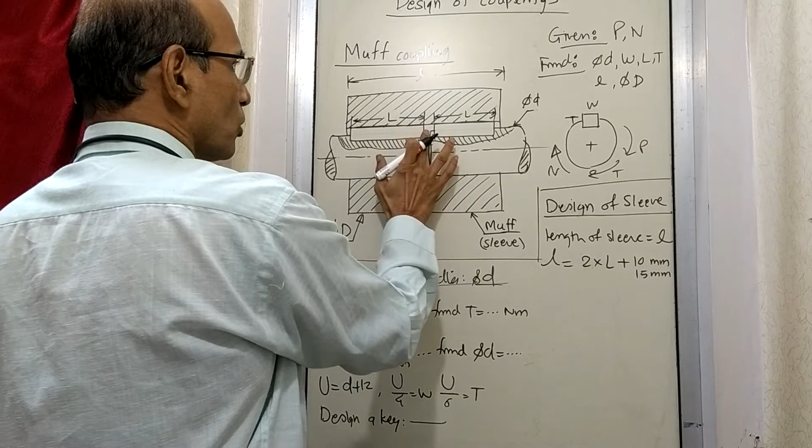Now, length of sleeve, which is L. This L is going to be 2 times L plus 10 mm, or even 15 mm. So this has to be double L, 2 times L, plus some extra space is also required. That is around 10 mm, 12 mm, 15 mm, depending on the size. By judgment, that is going to be the length of the sleeve, just by proportion, nothing else is required.

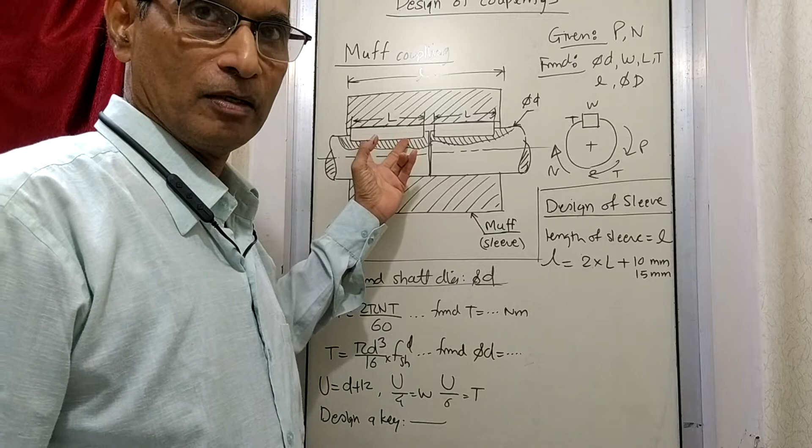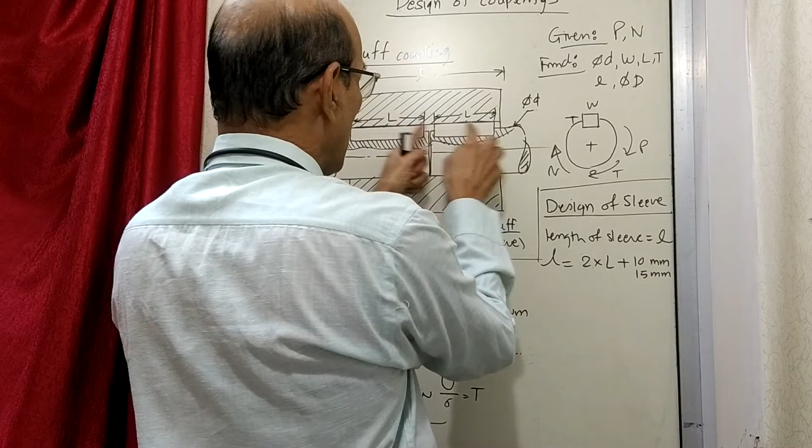So no failure criteria. Only thing is it should not be less than this, because if it is less, that means you are effectively reducing the length of the key. If this is only this much, then this part of the entire length of the key is of no use. Only the part which is in contact with L will be useful. But since we want L and L compulsory, this much length has to be there. So twice L is a must, plus extra because of this space which is there.

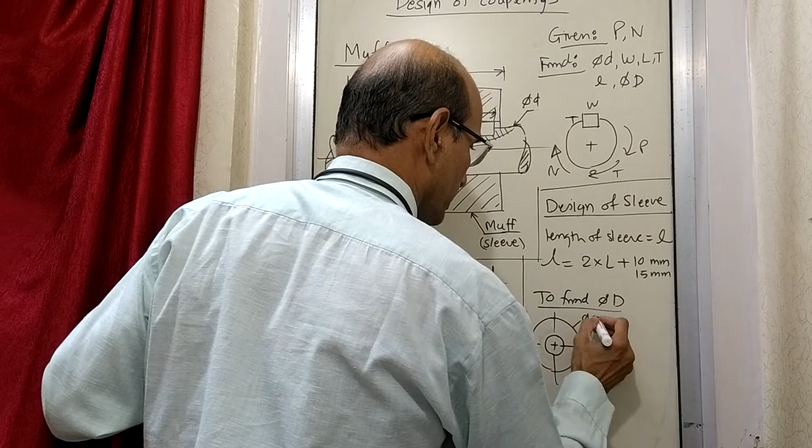Now to find the diameter, to find the sleeve diameter, outside diameter. If you see here, this sleeve is nothing but like a hollow pipe. If I draw the sketch of a sleeve, it will look something like this. Here diameter D and here diameter small d. So it is like a pipe, a hollow pipe.

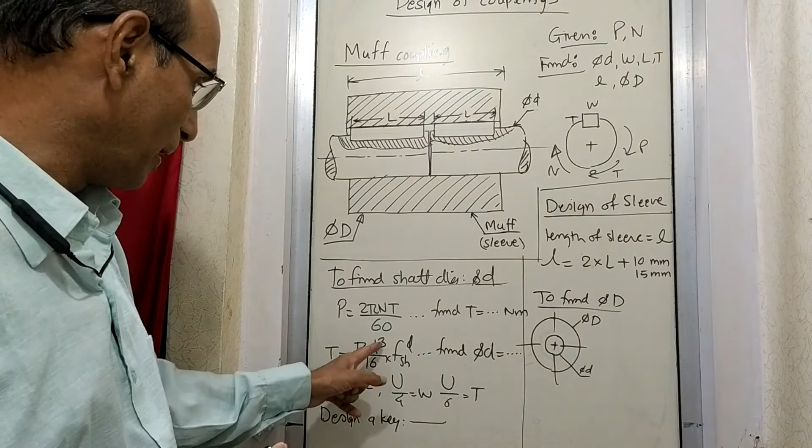Now on this hollow pipe, you are going to apply a torque, and when you apply a torque, how will it fail? That is the question. It is the same as what we wrote here earlier. When there was a solid shaft, it was to fail in shear, so we wrote the design equation: torque equal to pi d cube by 16 into shear stress, and you found the diameter of the shaft. Now the same equation we are going to use for this shaft. This also is a kind of shaft, a pipe, which you are going to twist.

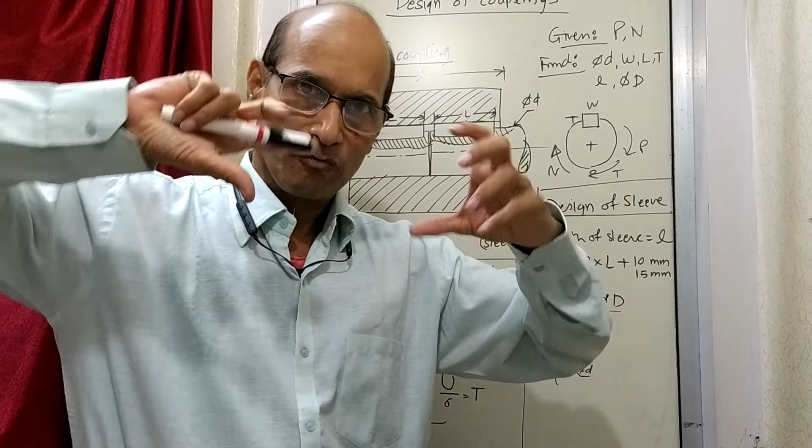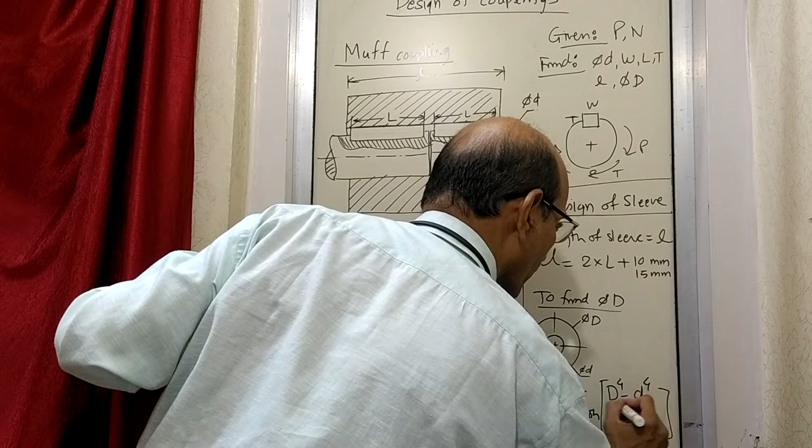So we write: torque is equal to pi by 16 into shear stress, and instead of d cube, I am going to write D raised to 4 minus d raised to 4, upon D by 2. Let's see whether you can understand this. In the case of a shaft, there was just one diameter, so this d was not there. So d raised to 4 upon d by 2, that has made it, in fact this has to be 32.

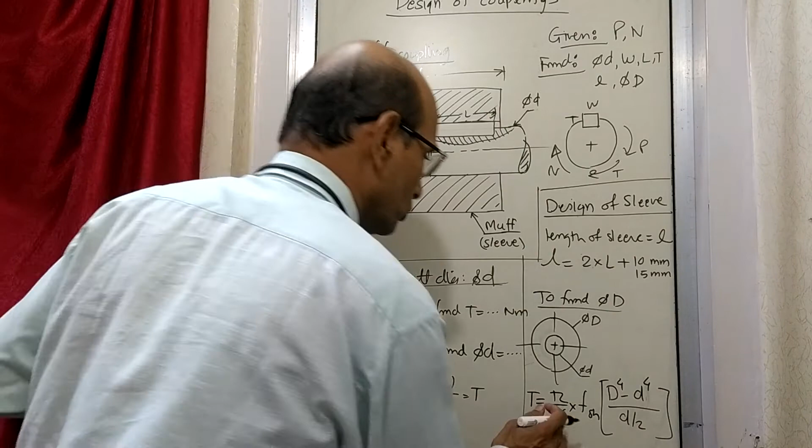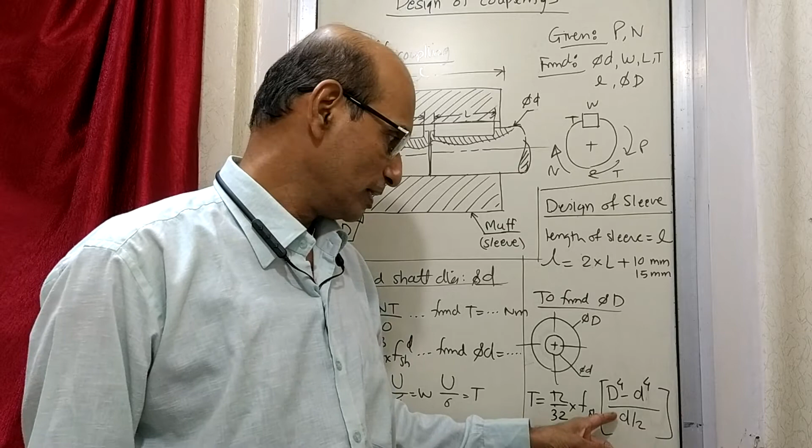So this 32 will become 16, and now what is this basically? This is what we have written earlier, the section modulus for this particular shaft. So D raised to 4 is for the outside diameter, small d raised to 4 for the inside diameter, and then divide by the radius. That is giving you this result, and if d was not there, then it was this result. Now for a hollow pipe it is this formula.

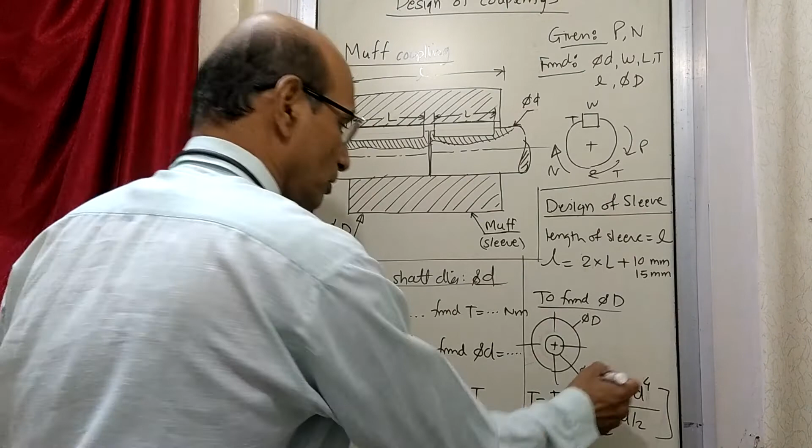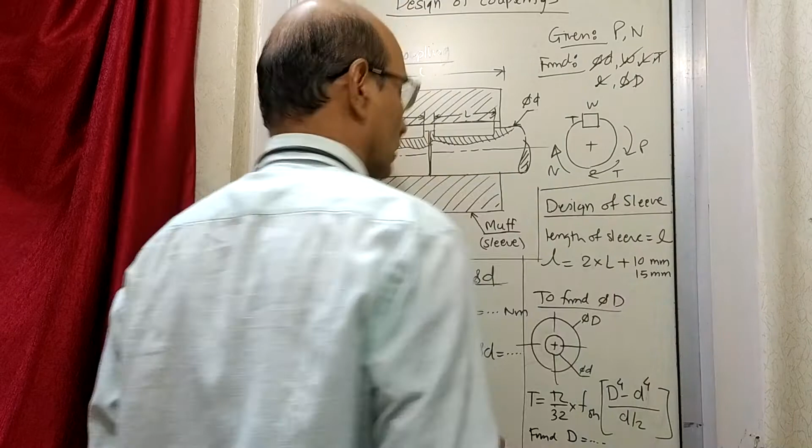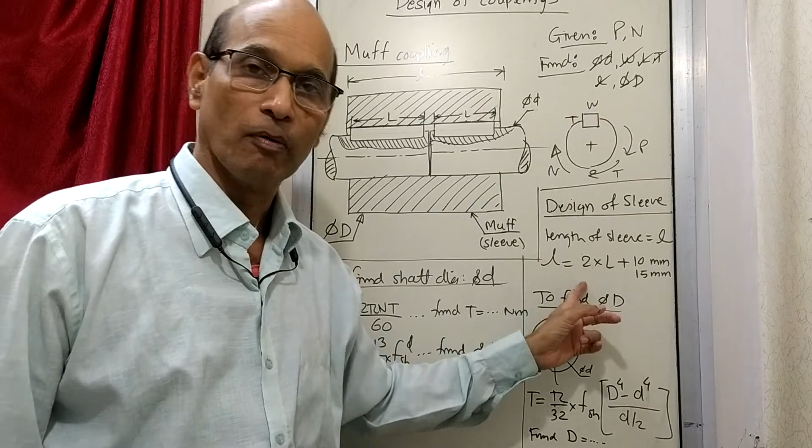So from this equation you can find out capital D. That is going to be your outside diameter, and the inside diameter we already found out. As a result, everything works out. So we have finalized the design of the muff coupling. It is very simple, because we already know this is the formula for design of a shaft - the same formula we have applied here. So both diameters, capital D and small d, are decided, and design of key we have already done earlier. This small l was nothing but double the length of the key plus some clearance. So that is how this muff coupling is designed.

A very simple kind of exercise. Now next time we are going to see some other type of couplings, for example flange coupling.

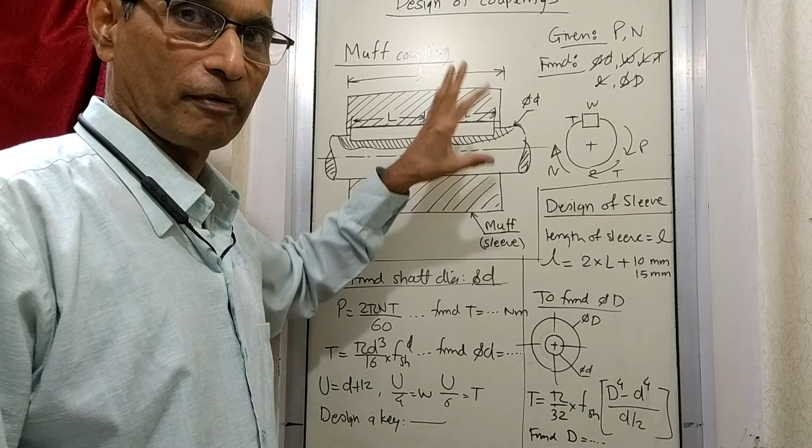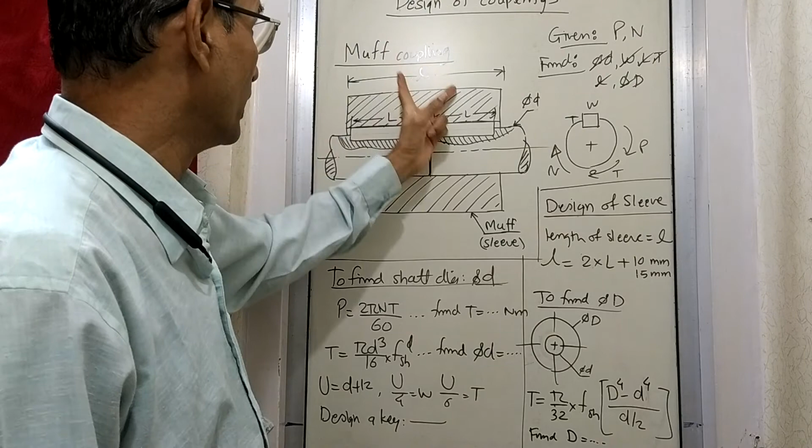Now all of you know what is a flange coupling. In the case of a flange coupling, this part is different, this part is different, and both these parts have their flanges, and then these two flanges are connected by nut bolts, and the power is transmitted. Here the sleeve is common, so in the common sleeve both shafts are fitted with a key. In the case of a flange coupling, there is a partition, this is separate, and this particular muff or sleeve is given a flange. This also is given a flange, and two such flanges are fitted with the help of nut bolts.

Okay, which we are going to see next time. Right now we are just seeing the simple kind of coupling, that is a muff coupling. Before that we have seen design of a key.